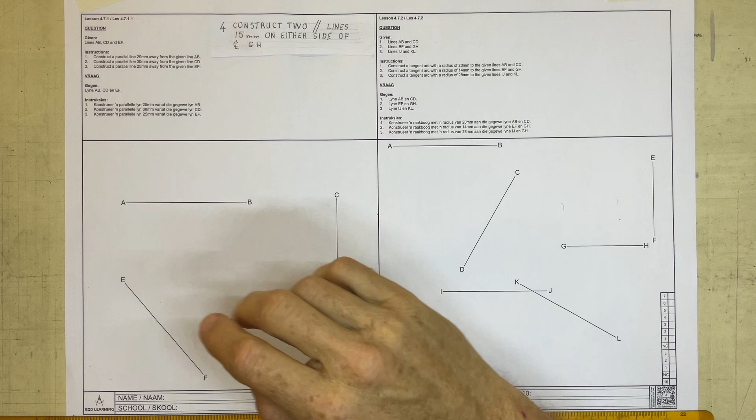Alright, what we're looking at today is drawing parallel lines to a particular line on your drawing. It says here that you need to construct a parallel line 20 millimeters away from line AB.

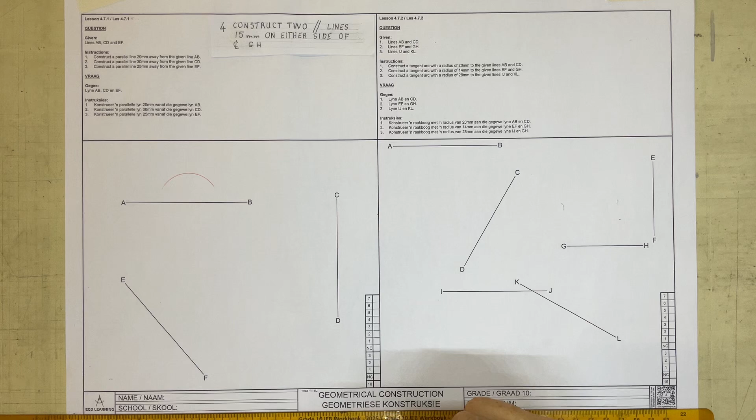So I'm going to set my pair of compasses to 20 millimeters. I go to line AB and draw a construction line arc, in red lead. I now take my ruler, place it as a tangent to that line, and draw a line going across which is now parallel to AB.

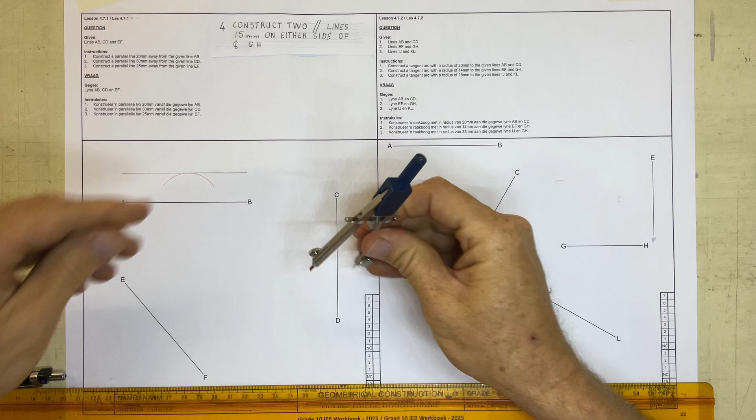The next one says I need to draw a parallel line at 30 millimeters away from CD. Same story: set your compasses to 30 millimeters, go into CD, draw a construction line arc, and take your set square lined up with your T-square, and draw a line as a tangent to that arc. You have a parallel line 30 millimeters away from CD.

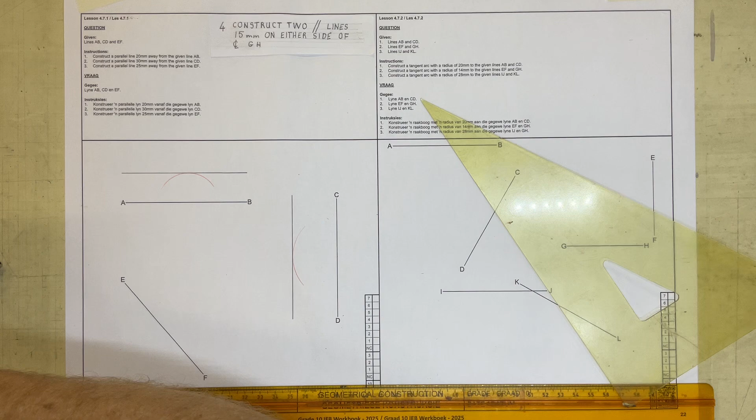The last one asks you to draw a parallel line 25 millimeters away from EF. Set your pair of compasses to 25 millimeters, come into the line EF, and draw a construction line arc there.

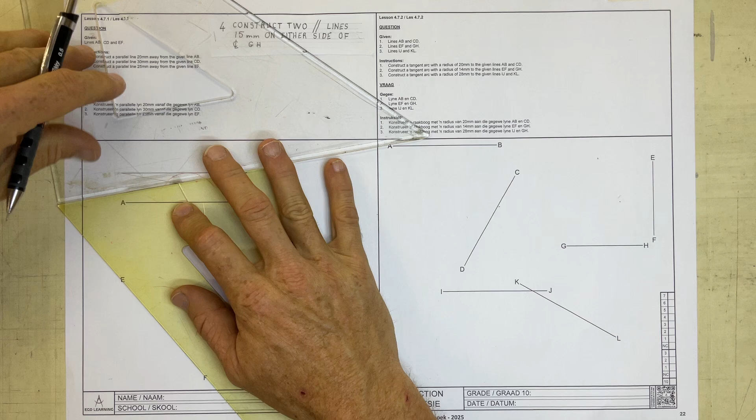What I'd recommend is that you move your set square and T-square out of the way. You're going to find another set square and line your two set squares up, like that and like that. Line this edge up with EF as accurately as you can, place your force down on that top set square, slide it across, and you'll have a parallel line. Hold this down firmly, and draw in a parallel line to EF.

I've put another little exercise in here which I'd like you to try. It says construct two parallel lines 15 millimeters on either side of line GH.

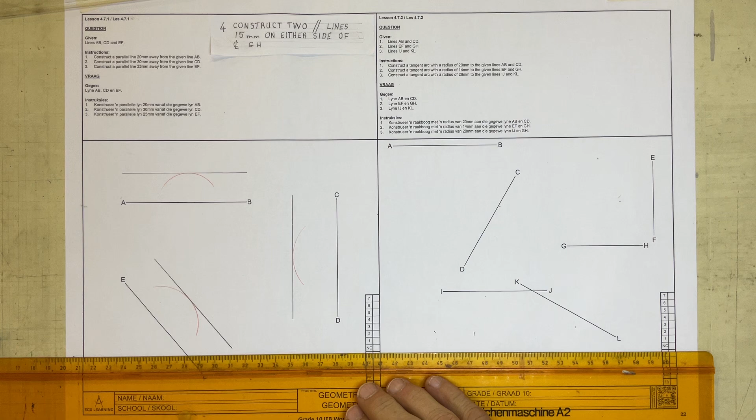Now you don't have GH on your board just yet. Take your 0.3 pencil, come in over here, more or less in line with NC, down to the middle of that 3, and draw in a center line: long dash, short dash, long dash, short dash, long dash, short dash, long dash. We can label that GH, G and H.

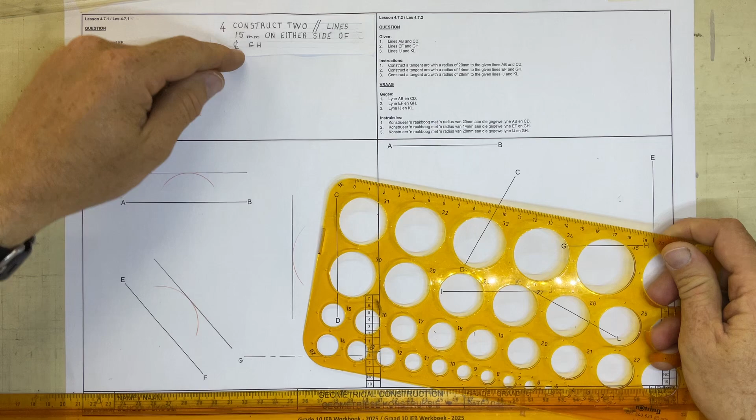Once I've got that, I take my circle stencil, and since I need a line 15 millimeters on either side, I use the 30 millimeter diameter circle to draw a construction line on that side and that side - these two construction line arcs. I can now take lines drawn exactly 15 millimeters away from that center line, and that is a very useful trick to have.

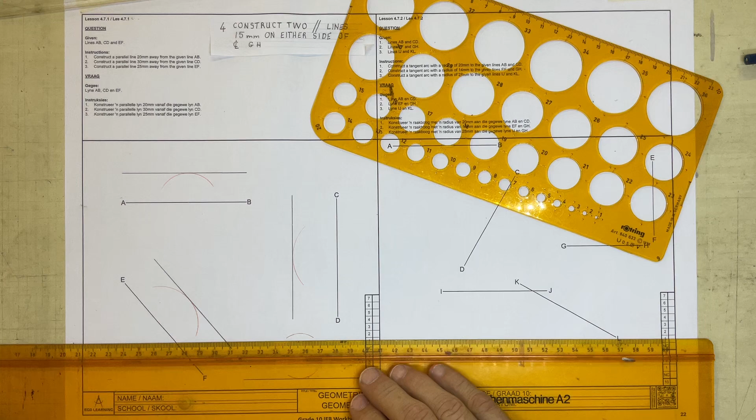You're going to see me using it many times in some of the mechanical drawings and other drawings that we do. Right, that one is done.

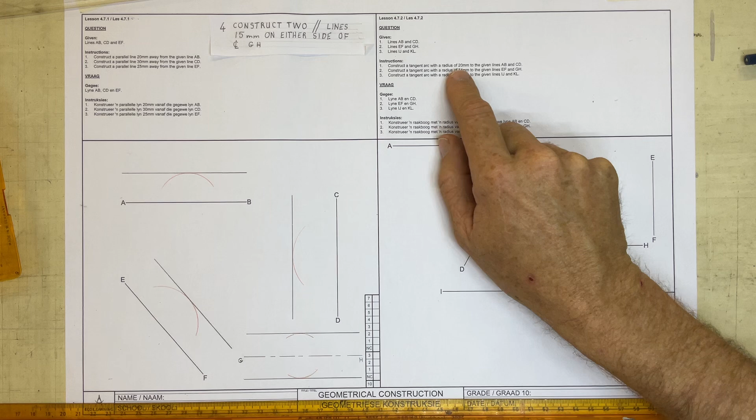The next one is to do this over here. They've given you a whole bunch of lines, and they're going to ask you to construct tangential arcs with a radius, in this case 20 millimeters, between AB and CD. So what do I need? Again, the pair of compasses, set to 20 millimeters.

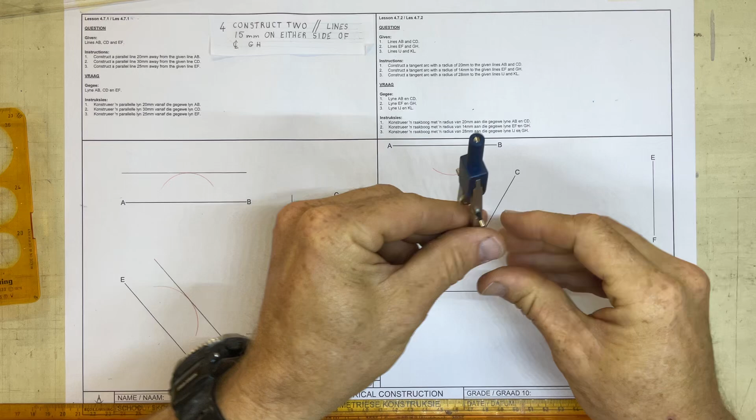I take my pair of compasses, set to 20 millimeters, come in here and draw a construction line arc with a radius of 20 millimeters, and another construction line arc with a radius of 20 millimeters. Once I've got that, I check quickly to see whether this angle is a set square angle - that is a 60-degree angle, which makes life very easy.

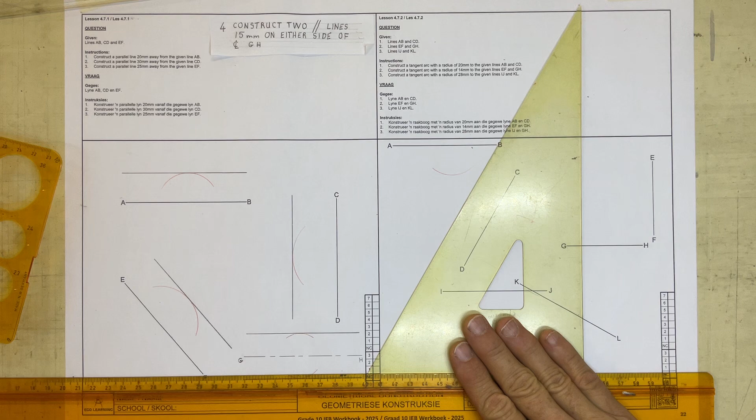You're then going to draw a construction line as a tangent to that arc - it's not a dark line, it's a construction line. And I'm going to take a construction line coming to a tangent to that arc, going across there. Let's get that in place.

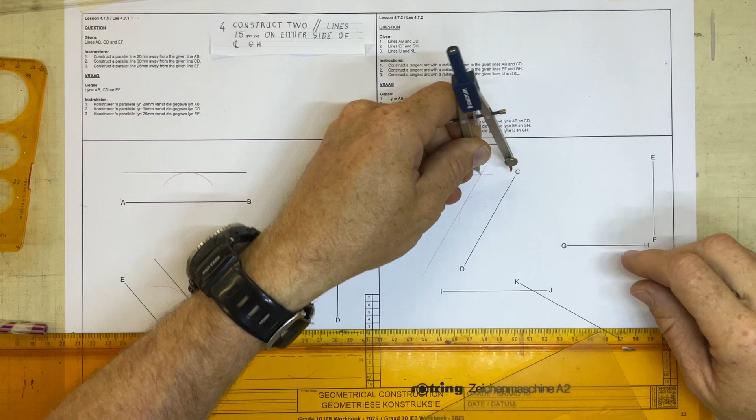Once I've got that in place, I then take my pair of compasses, still set to that 20, and I'm able to draw an arc which will come around and touch both sides perfectly over there and over there. Just need to move that point until it is actually touching there, and I'm now going to draw in a nice dark arc going around like that.

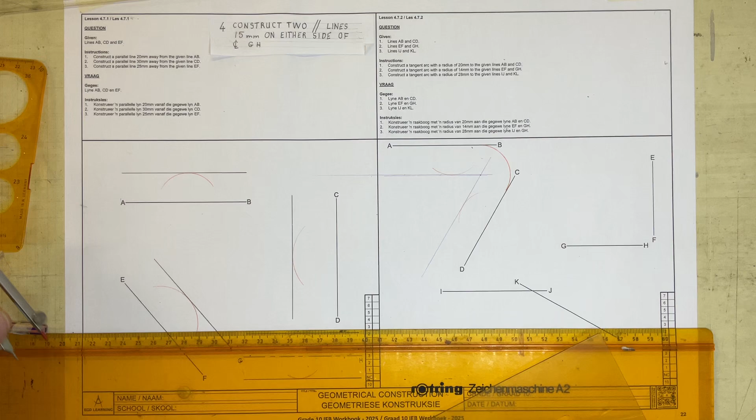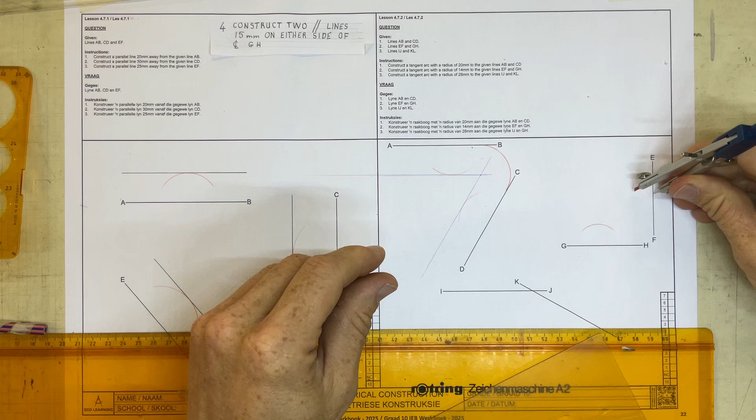Once I've got that in place, the next one says construct an arc with a radius of 14 millimeters to EF and GH. So I'm setting my pair of compasses to 14 millimeters. Coming over here, draw a construction line arc there, and another construction line arc there. And I'm going to draw a construction line going across as a tangent to that, and draw a construction line as a tangent to that.

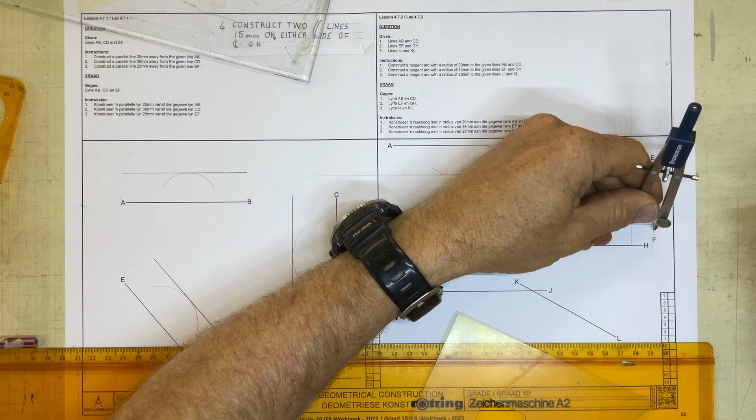Once you've got that in place, take your pair of compasses again, and you can draw in this 14 millimeter radius, starting there and ending there. It should end up perfectly linking up over there.

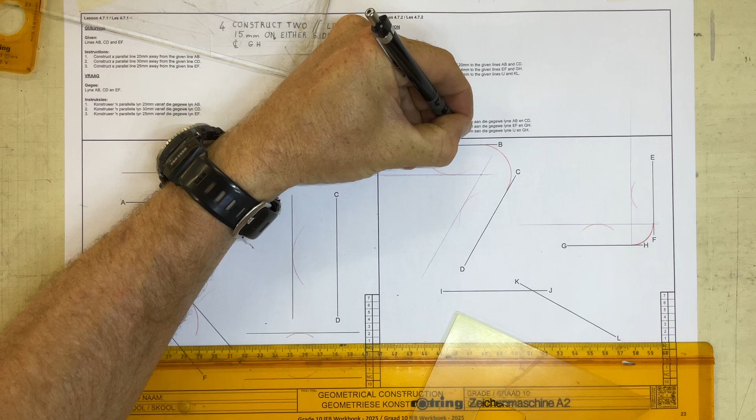The last one says you need to construct a tangent arc with a radius of 28 millimeters to the given lines. I'm actually going to increase that, if you don't mind - I'm going to make it 32 millimeters. Let's change that to 32 millimeters, it'll just be a little bit easier. 32 millimeters, everybody got that? It'll make life a whole lot easier.

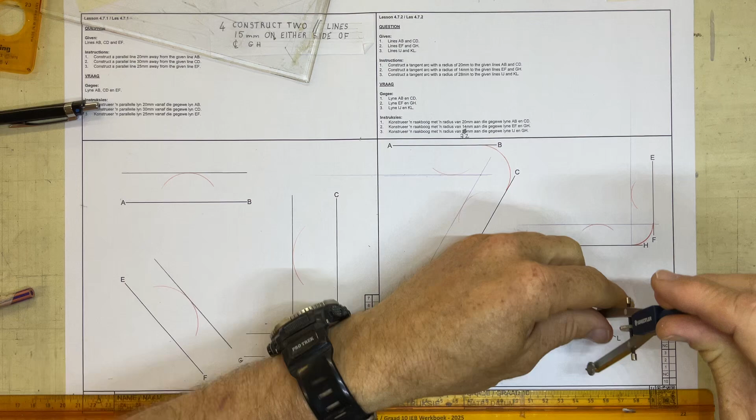Set your pair of compasses to 32 millimeters, a 32 millimeter radius. Place it here, draw a nice construction line arc. Place it there, draw a nice construction line arc. Let's just move it along a little bit. There we go. I'm going to draw a construction line coming across over here.

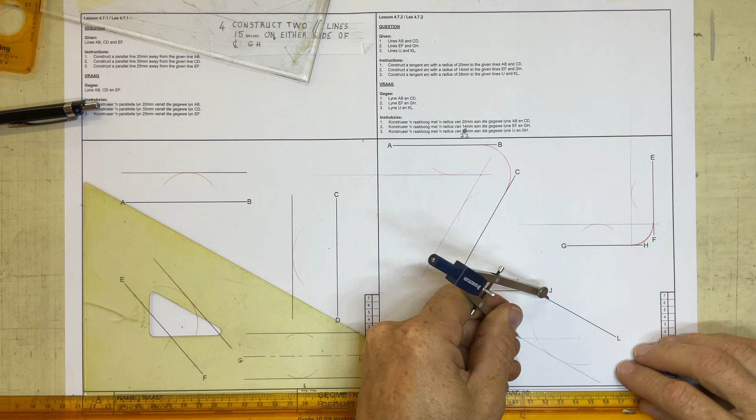I'm going to check whether this angle is a 30 degree, which it is, which makes life easy. Come down here and draw a construction line going across there. With your radius of 32 that we've got, I'm going to draw a little arc going around, which is really not showing up very well because of these two lines that are actually intersecting. Right, that's done.